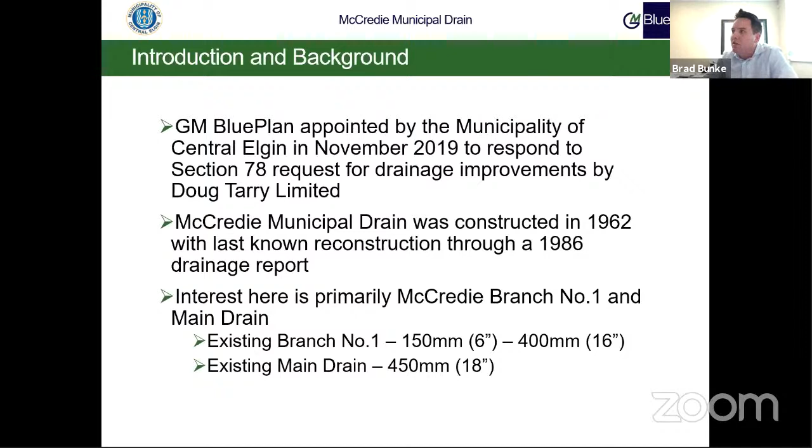To start out, introduction and background that Jeff talked on mostly as well. Doug Tarry Limited filed a Section 78 request under the Drainage Act in November of 2019, and the improvement is to be made to the McCredie municipal drain. This drain, from the background we received, was constructed in 1962, last reconstructed in 1986, and generally speaking, the existing system is as small as a 6-inch drainage tile and as large as an 18-inch tile into its outlet.

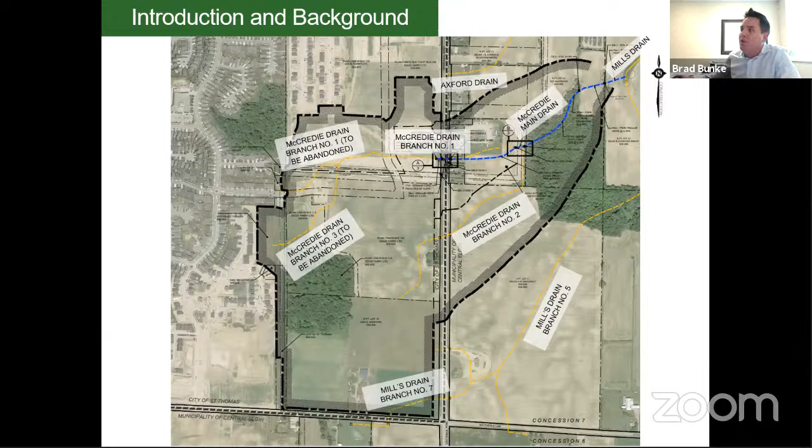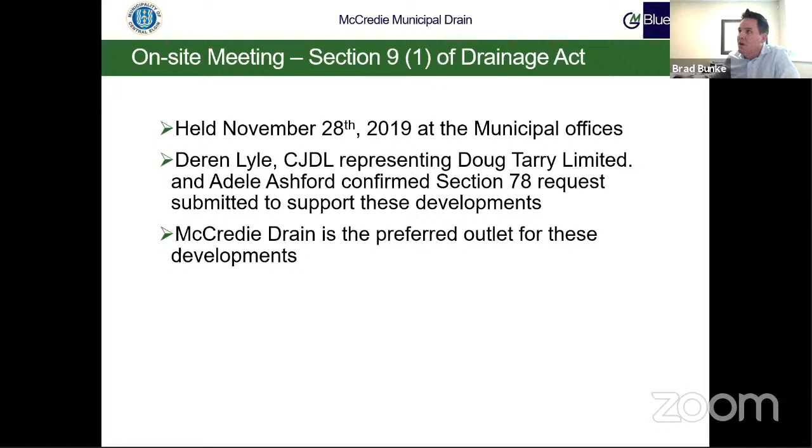Won't go too much into this, but as part of the process, we held our on-site meeting with the developer's engineer and did confirm the McCredie drain is the preferred outlet for the development.

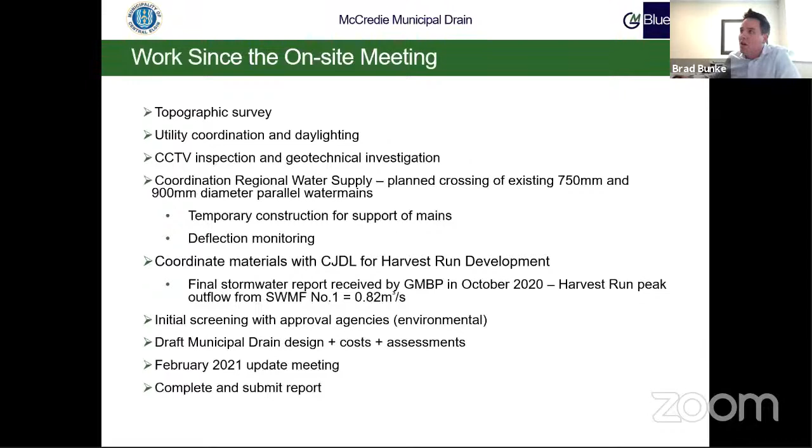Coordination as well with the developer's engineers, CJDL Engineering, in terms of the required outlet flow they're looking for this drain to handle. And also some work with the environmental agencies, some costs. We held an update meeting with some of the affected parties in February earlier this year, and the last bullet, we're at the point of having now submitted our report.

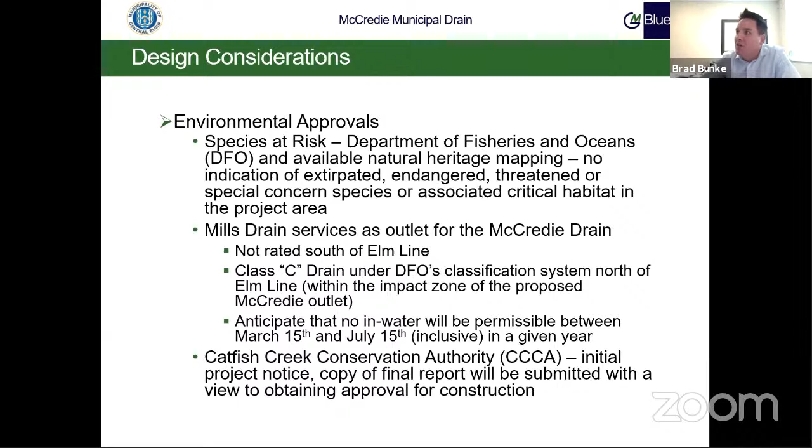We do have what's called a Class C drain under the Department of Fisheries and Oceans classification system as our outlet, which is the Mills drain. What that means practically here is that no in-water work for this project can occur between March 15th and July 15th of any given year. Talking to the developer, I don't think that's necessarily going to be a concern.

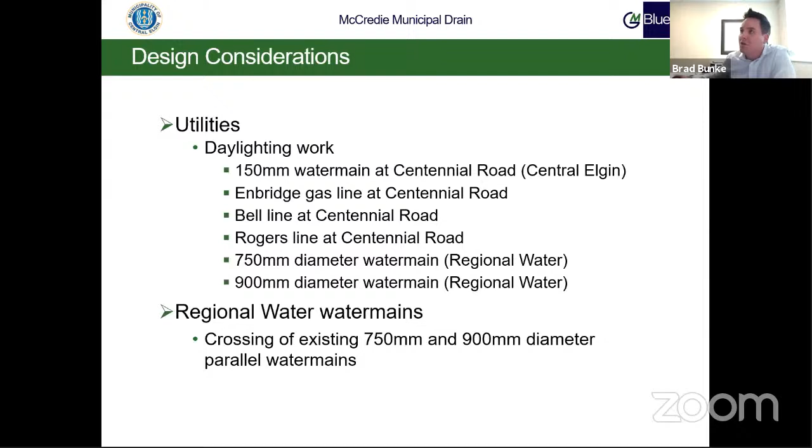Another design consideration was the utilities. As everyone can probably appreciate, there's a fair amount in the road at Centennial Road in terms of Rogers, Bell, Enbridge, and a municipal water main as well. And then the two larger and most prominent utilities here are those two regional water mains located east of Centennial Road, a 750 millimeter diameter and a 900 millimeter diameter parallel water main.

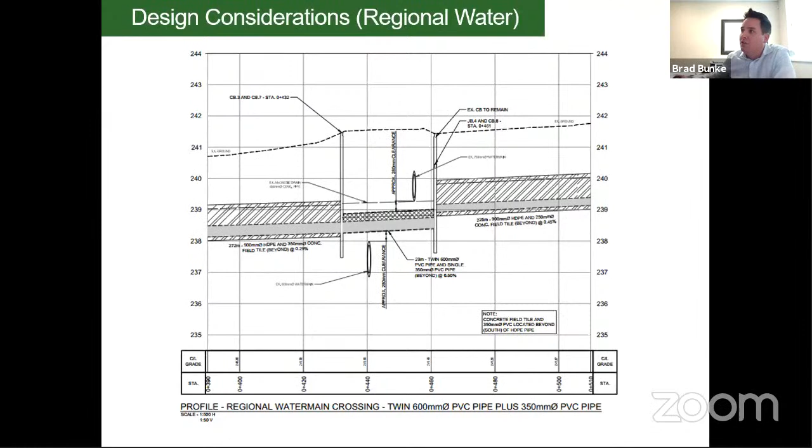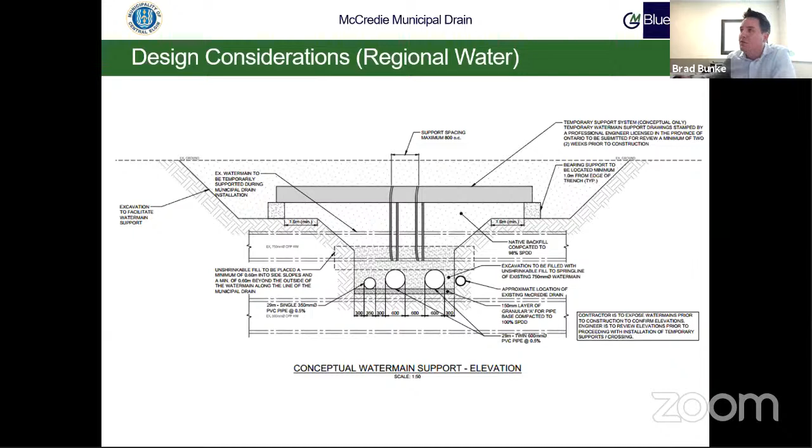This is an excerpt from our drawing set. What we're looking to do with our system - the two water mains are shown going into the page - and we're looking to essentially go above the 900 water main and below the 750 millimeter diameter water main. That'll necessitate some temporary support during construction. A little bit unique, but something we've done before with regional water, as well as with municipal drains.

In terms of the sizing and where we came up with the size of drain that we're looking at, the grades that we're permitted to use were largely determined on the inlet and outlet elevations of our drainage system, and also a desire to maintain drain cover over the pipe too, so it's not too shallow.

As expected early on, we proved that the existing McCredie drain does not have sufficient capacity to accommodate the flows from the proposed stormwater management facility. And in company with that, even the residential and agricultural lands east of Centennial Road downstream on the system.

So what this all equates to for us, in the very bottom bullet, is a separate system. Our proposal is to create a watertight HDPE - high density polyethylene - pipe that would be devoted exclusively to the stormwater management facility in the Harvest Run subdivision, and then have the concrete field tile accommodate the downstream lands, which is going to be more of your residential and agricultural.

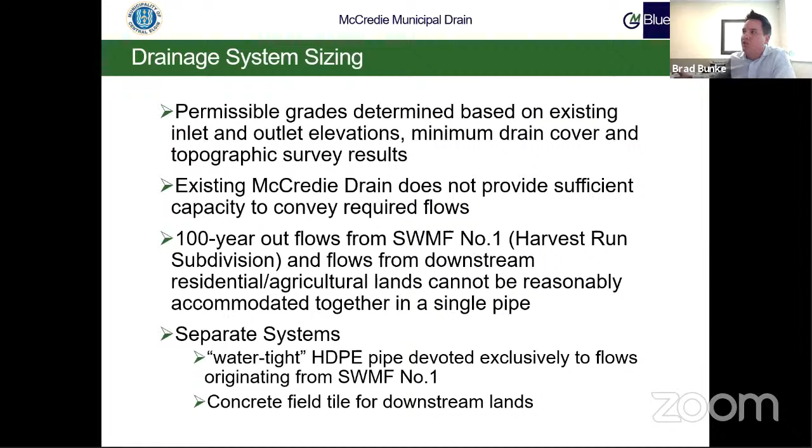Probably hard to see this at that scale, but this is a summary of the work that we're proposing. The existing McCredie drain is to remain. We have what we're calling our Harvest Run component of the pipe, which is that watertight pipe again, between 525 and 900 millimeter diameter, a combination of single and twin systems. It will accommodate the outflow from stormwater management facility number 1 in the Harvest Run subdivision, which is a 1 in 100 year outflow level.

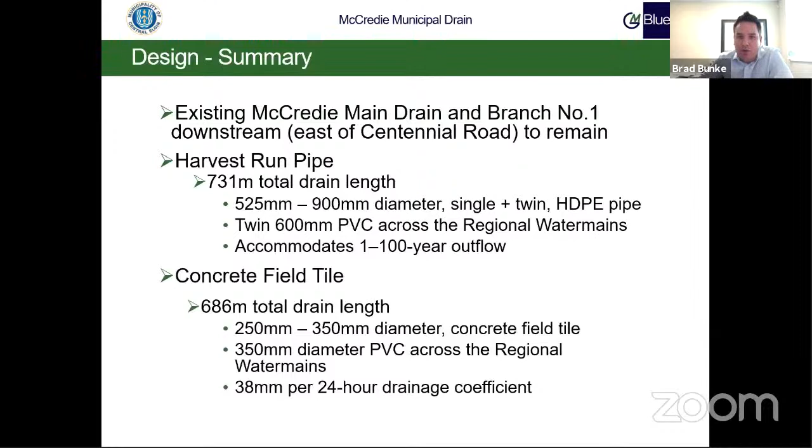The concrete field tile, which again is more of your private tiling - residential and agricultural - is similar in length, smaller in size, and a much lesser level of service in terms of 1.5 inches for 24-hour drainage coefficient, which is more typical for land drainage here as well.

We have included within the report allowable working areas for the contractor for not only construction, but also maintenance in the future. This also relates to allowances provided to the landowners within the report, specifically right-of-way for the existence of the pipe. Landowners can be compensated for damages, whether it's crop damages, trees, or any other element that's being damaged during construction of the work itself.

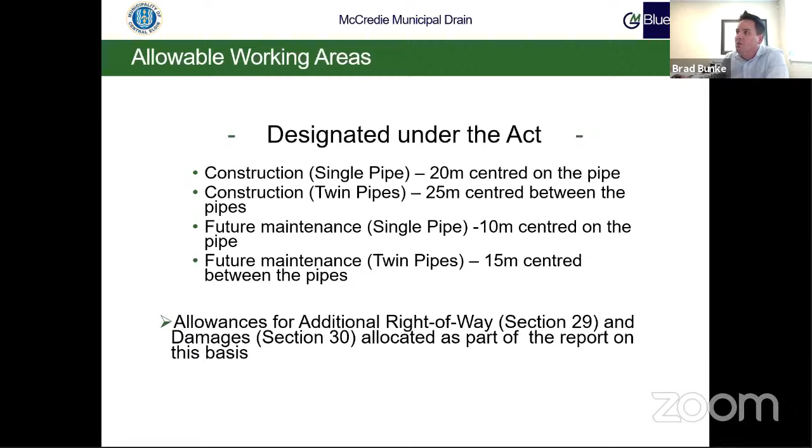I'll put together - and I don't expect anyone to read this based on size - but this is our compiled cost estimate for everything within the work. For summary and for council's consideration, here are the main components of the cost for the McCredie drain: allowances for right-of-way and allowances for damages, totaling a little over $5,600. The drain itself, being the McCredie drain construction, we have a little under $400,000 as far as an estimate.

The work to support the regional water main and the work to cross Centennial Road are at $68,000 and $42,000 respectively. There's some miscellaneous utility costs and considerations, and the non-construction costs at the bottom, which include our engineering, some of the geotechnical, some of the CCTV, and taxes as well - a little over $110,000. All told, our cost estimate prior to any tendering or procurement of services, based on past similar tenders, we're sitting a little less than $650,000 in terms of the estimate.

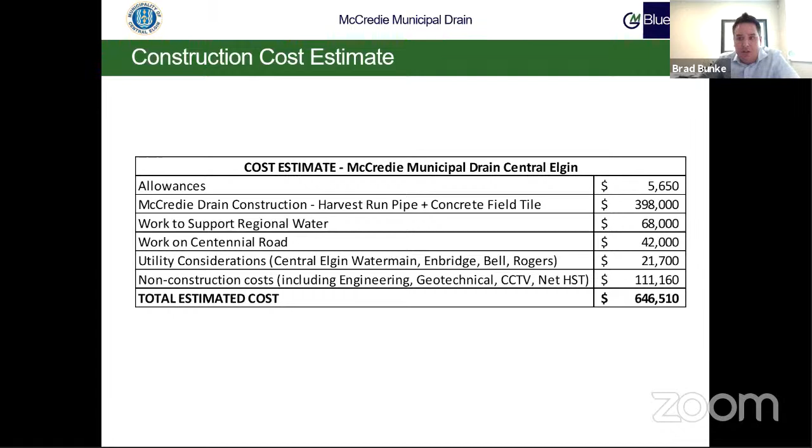As council will be aware, when the costs are estimated, part of our work is to come up with an assessment table in terms of who pays for those costs. Generally speaking, we follow what's called the modified Todgham method, which is considered a fair and equitable approach in the industry to distribute the costs. Larger properties tend to pay more.

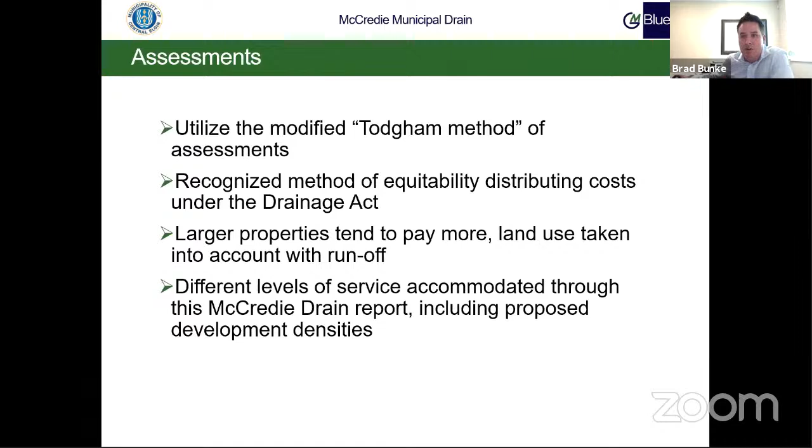Also, the land use is taken into account. The harder the surfaces, the more potential for runoff. And with the help of the developer's consultant, we've also reflected in our assessment tables the higher density areas within the proposed development that would again produce theoretically more runoff.

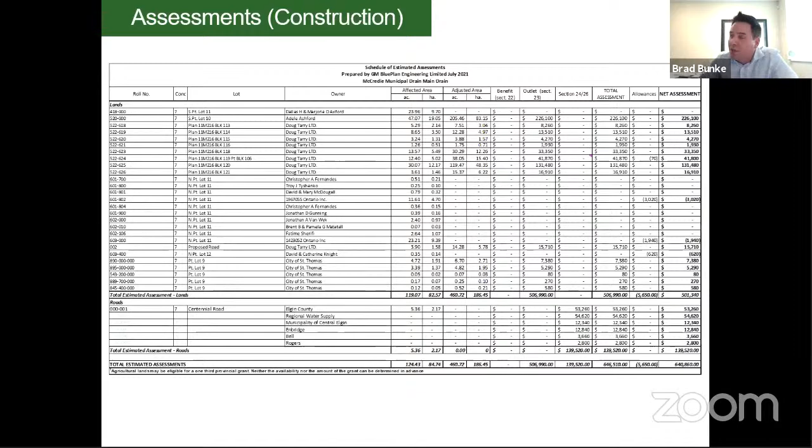Also, the allowances, as mentioned, which are provided to landowners who will have some form of allowance. And the far right-hand column is what we term our net assessment — that is the out-of-pocket costs based on the estimates that we have in the report.

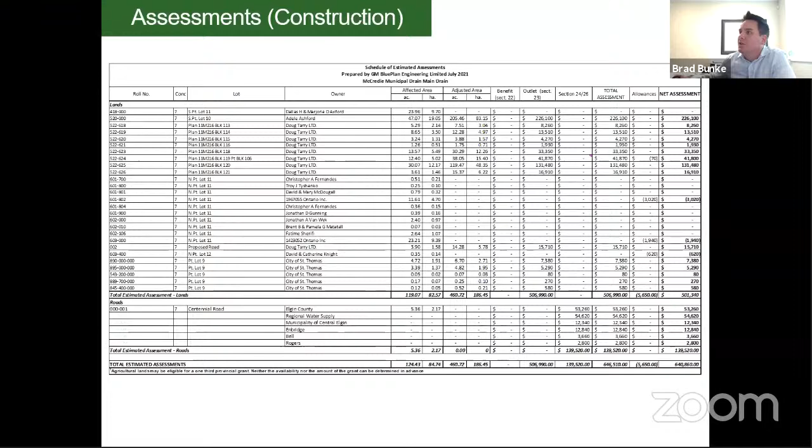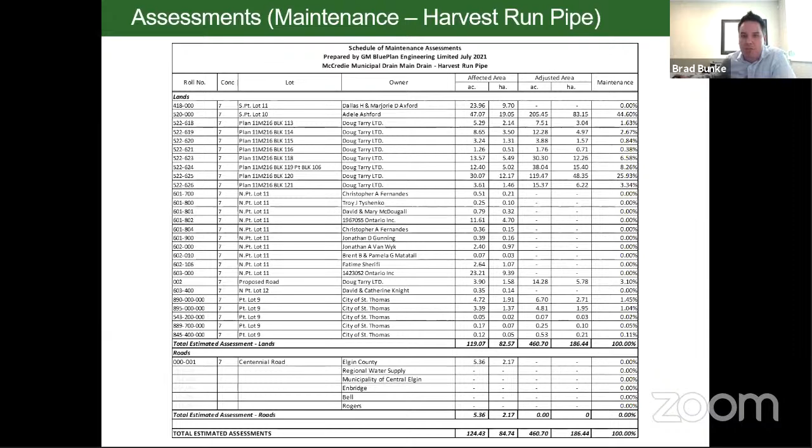Finally, we have three maintenance assessments that are more so for future use by your drainage superintendent, in the sense that they are expressed as percentages based on some fictitious repair in the future, and they're used prorated to help with future maintenance costs should something need to be done on the drain down the road. So there are three assessment tables there, and that is a very brief rundown.

I'll stop sharing my screen here and I'm happy to take any questions or comments.